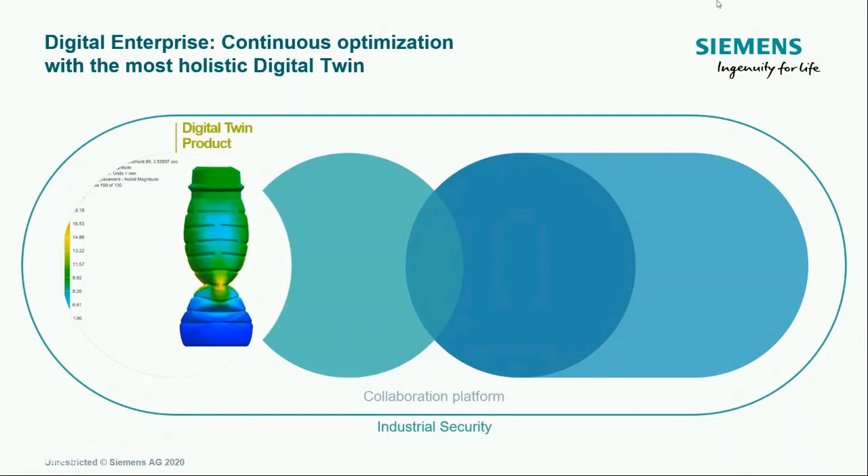The first digital twin is the digital twin of the product. In this, you would use, for example, CAD/CAM software in order to envision your product, define it, and so on. But not only that, you would also want to simulate the performance of your products and so on, so you would like to see the flow and motion analysis, the engineering optimization, and so on.

This really helps in developing a product where you don't have to build physical prototypes. What happens under the digital twin of the product is that you're able to bring together that design principle, the mechatronics concepts or electromechanical design, and put that essentially along with the simulation in a singular layer of digital data model behind it. When you're able to do that, you're actually able to create that virtual product in a much better manner - that's what the digital twin of product is.

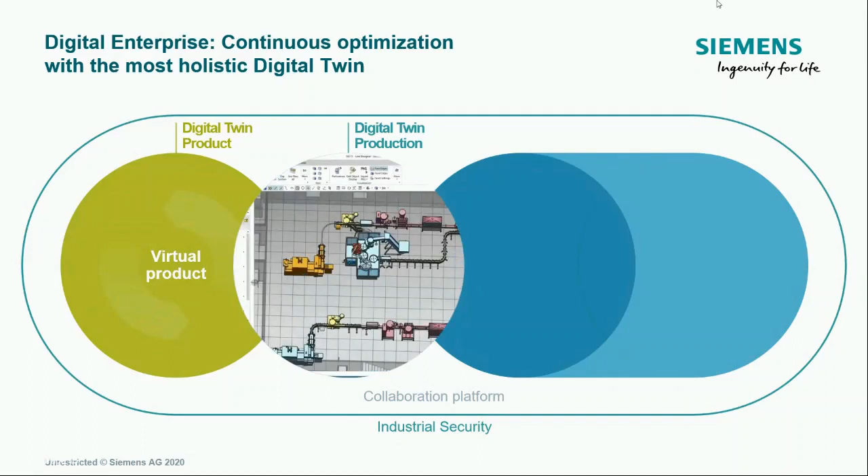Now that you have developed the product that you want to make, you want to envision how you would actually produce it. This is where the second digital twin I would introduce is the digital twin of production. This is basically looking into how would you lay out a complete factory - what all do you need in your factory environment, how many people would you need, what kind of line setup would you need, robotics and so on, what are the buffer times that you want to plan, and what's the output of your factory.

All this can now be done in the virtual world. So without even laying a stone or a brick in your factory environment, you're actually able to make your complete factory in the virtual world and make sure that this is working in a perfect manner to the KPIs that you want to plan it to.

So normally the digital thread, as I call it - the interconnection between digitalization - this is where it would break, because you have the virtual product, great, and people will go on and start doing manufacturing. Not anymore - you can actually integrate the virtual production with the real production already.

This is where the digital twin of production actually enhances with concepts such as virtual commissioning, which I will also be elaborating a bit further, where you can actually have an automation code already developed, test it in the virtual world, and just download it and play it to effect when you actually implement your automation in the real world.

So Siemens has a huge portfolio on automation with motors, drives, controllers, and so on, and that enables the real world. But this is also advanced now in terms of software-based mechanisms which allow us to do advanced automation. We could have stopped there and said, yes, we already provide the automation which is required. But what we actually do is go forward in the real world to drive that digital twin of performance, which is our third digital twin.

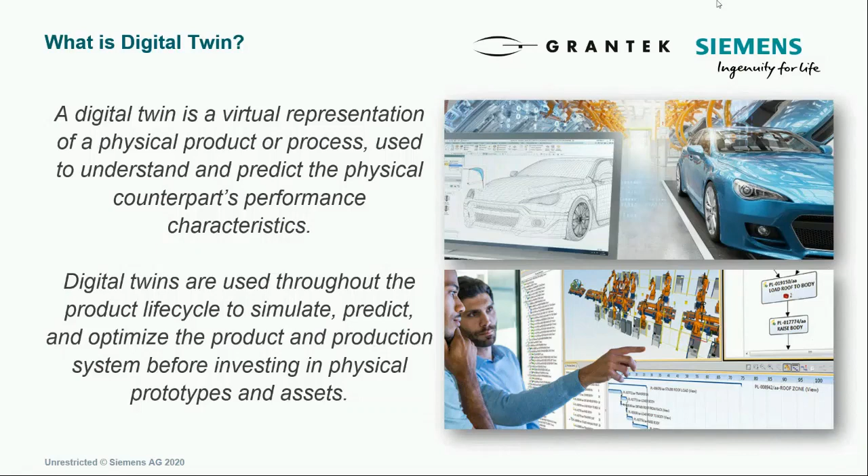And if we go to my next slide, with that in mind, one of the things that I find really interesting when we talk about digital twins is to think about how digital twins are not a concept that is owned by manufacturing and industrial companies. Virtual representations of physical products and processes actually have a lot of applications outside of just manufacturing, which we can look to for even more examples, inspiration, and context.

One of my favorite examples of this are the mapping and navigation apps on your smartphone, and the story of how we got to where we are with them today. Some of you, I'm sure, remember that before we had these computers in our pockets, when faced with the question of how do I get from point A to point B, you would take out your map, which you would hope is up to date.

You would plot out your route and you just go. Did you pick the optimal route? There's no way to really know. And if you hit traffic or construction or a road closure, you'd have to either take a guess or stop and take out your map and plot out a new plan. Then online mapping tools took off, right? Everybody remembers the MapQuest days.

Here we're starting to go digital, and it gets to more useful tools like reliably up-to-date maps along with data like speed limits. This starts to solve the optimal route problem by saying: if you can drive along these roads at these speeds, then this is theoretically the optimal way to get to where you're going. But it's not real time yet.

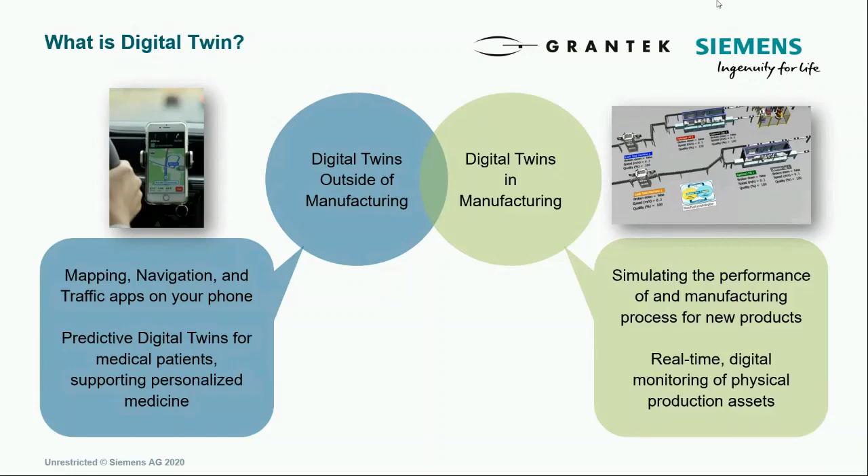And the world is starting to take notice on this too. While the global digital twin market is around $3.1 billion today, it's expected to reach $48 billion by 2026. Unlike some other Industry 4.0 technologies, digital twin is expected to grow most in North America. Most manufacturing applications of digital twin today are in discrete manufacturing like aerospace and automotive, but we expect significant growth into process industries like food and beverage as they start to take advantage of the success stories and lessons learned in other industries.

Finally, it's important to note that the foundations of digital twin are often already in place and in use today, but they're often guided by people and may not connect to real-time data. A SCADA system is a form of digital twin, but it usually requires a human operator to interpret the information and make decisions. We're going to see that start to change as we tie more automated, intelligent computer systems into this real-time data feed to help us make more informed decisions and changes to our processes.

So now that I've given you a little more background on what the digital twin is and why it's important, I'd like to hand things back over to Shalabh to give us examples of the actual technologies used for product, production, and performance digital twins. Back to you. Thank you, Sam, for that.

I'll try my best to give you a couple of examples on each of these digital twins. They are in no manner comprehensive enough, but at least it gives you an idea of a couple of the portfolios which go under each of the digital twin categories.

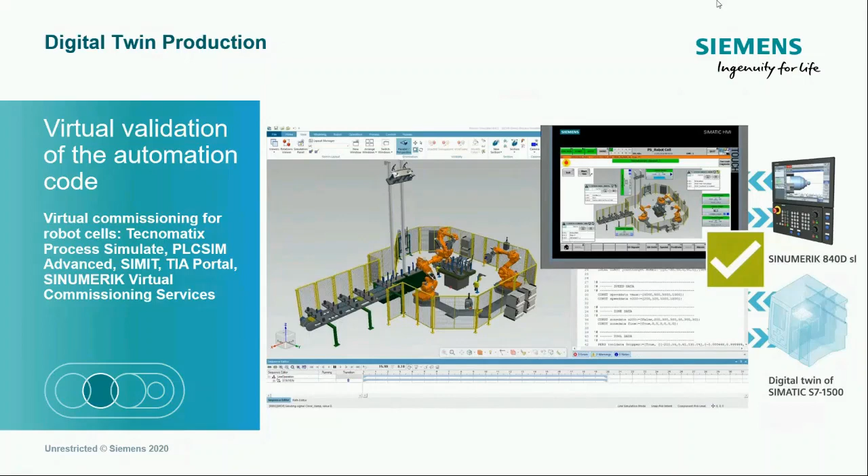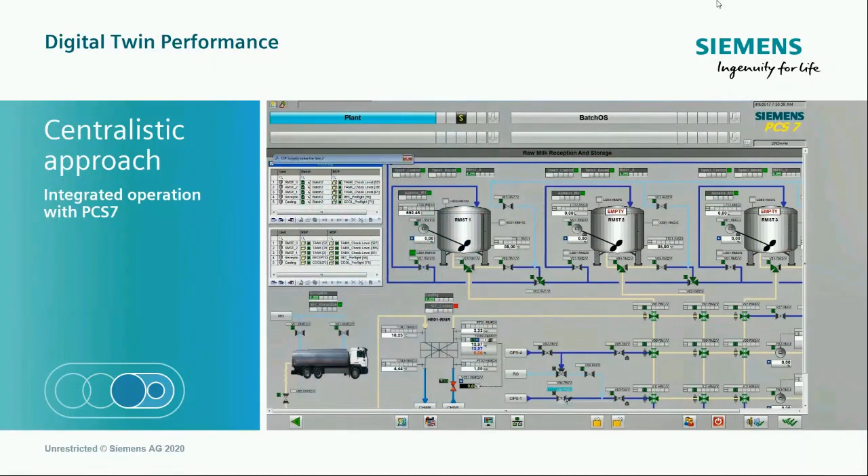Lastly, I touch a little on the digital twin of performance, and here is our integrated operations with PCS7, which is our DCS system. It helps optimize production based on high plant and process transparency within a digital twin. It also gives seamless transfer of data and testing of automation functions when used in combination with SIMIT. The simulation functions of SIMIT get the automation data directly from the PCS7 and COMOS solution, and offer the possibility to test the automation code and process control functionality.

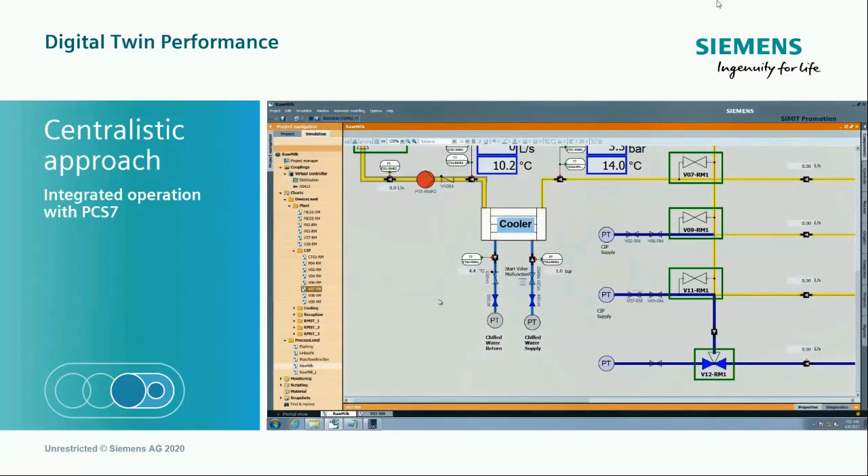With SIMIT, as I was saying, this is a really good portfolio. You can also do things like operator training, so that your operators are trained before you actually end up doing the process. So in totality, the benefits are efficient and smooth system startup, increased safety, and avoidance of errors and costly rework.

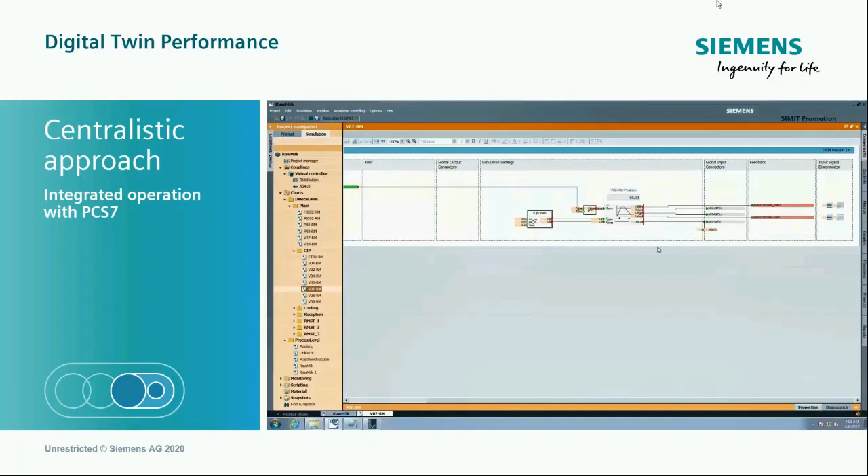So these really are the three digital twins, and I tried to give one example under each umbrella to see how they can add value to your operations. Sam, in going further, would you have certain use cases of how these digital twins can be used?

Yeah, absolutely. I would like to take that and go through the production and performance digital twins to talk about some use cases and examples, and some tips on new philosophies for how we can approach the digital twin for these areas.

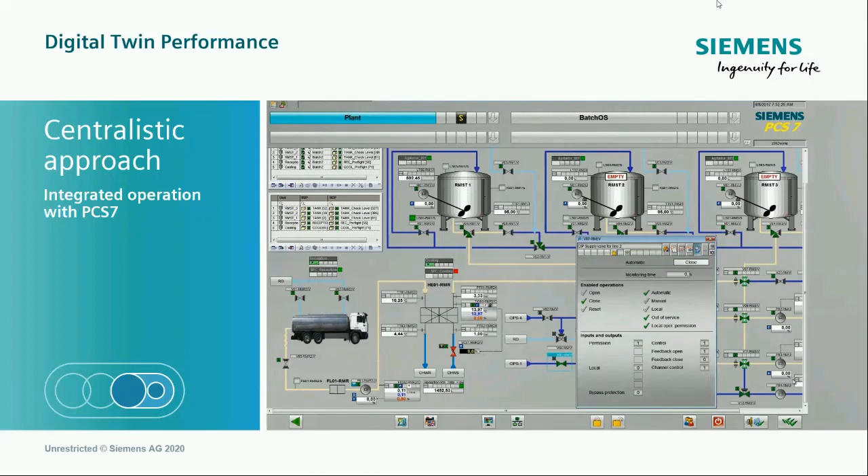So if we go to my next slide, we'll start with the digital twins for production. This is where we have a digital representation of our actual production process, and it's particularly useful when you're considering changes to production, like the commissioning conversation we were just having. Commissioning is expensive. You lose production from required downtime, you need to pay for an on-site engineering team, and significant changes are inherently risky to your overall processes. So there are clearly opportunities for savings by reducing time and reducing risk around commissioning activities.

So when we talk about virtual commissioning, really the essence of what we're talking about is using the tools that we can to take any activities that would normally be done on site and bring those back into the digital world, using modern simulation and testing software to validate code and process changes. That's not to say that all of commissioning can always be done virtually.

There are a lot of tasks that typically still need some on-site presence, but the more we can bring off-site and test virtually, the less time and risk we have in our actual commissioning processes, which just leads to direct project savings.

When it comes to product digital twins, we're more focused on the digital replication of the physical product we are producing. You can imagine how in some industries, especially automotive and aerospace, having a digital copy of every individual serialized part produced could really help with things like preventative maintenance on that part.

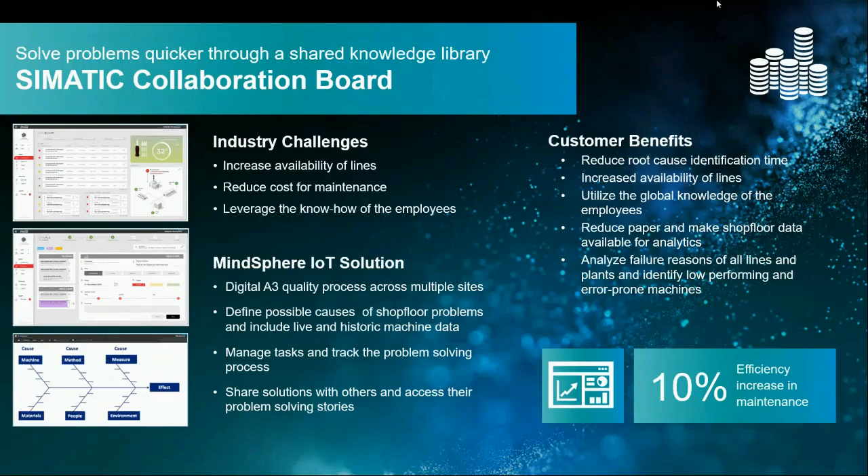But we could have been satisfied with that, right? And we could have said, yes, we have the digital twin of the product, production, and even performance, and we have the IoT platform. Everything is good, but where are we taking this further?

Actually, what we are trying to drive is how do we solve this complexity? How do we make it much more efficient? And if we were only basing our decisions only on data, you could do a big science project out of it, right?

Some of the mathematicians and statisticians in the group might think, okay, if I get all the data, I can dig into this and create so many different variations of what could be done.

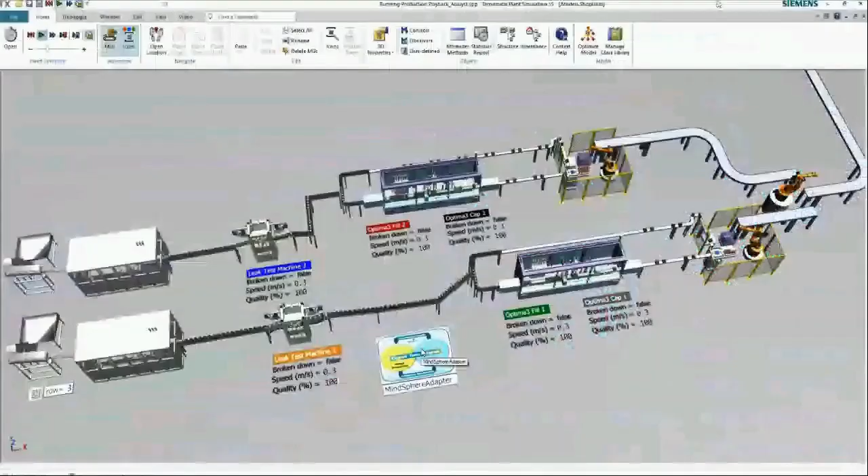But what we did is we started combining the physics-based model with the data-based model. That's the beauty of Siemens, and the solutions are really integrated. So whatever you simulated in a plant environment and you made some assumptions in order to what you want to drive,

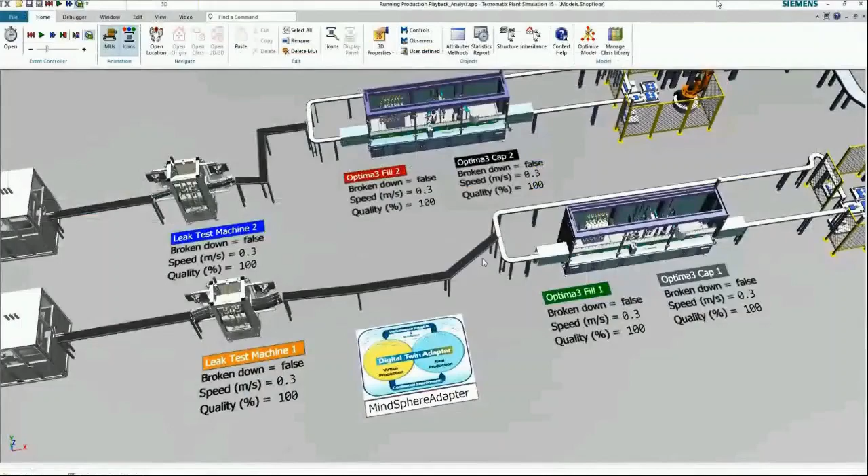you can actually, with a click of a button, drive the actual data back into the simulation, and you can see really now whether what you had planned is what is getting executed, because you now are backing it with real data.

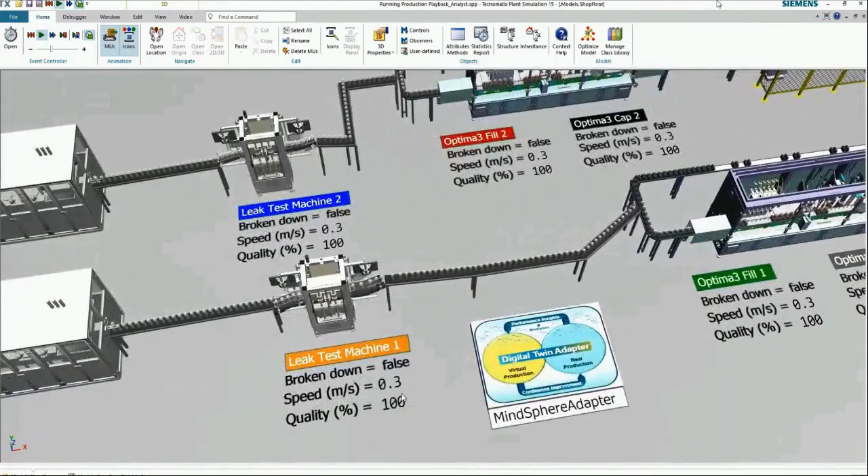And that's where you start measuring the quality, the speed, what was my breakdown time, and so on, because you're combining what was planned to what is being executed today.

And that is all combining and integrated with our solutions, around MindSphere, and as I said, around Tecnomatix. So this closed loop manufacturing is something which we are enabling, and we are making it simple.

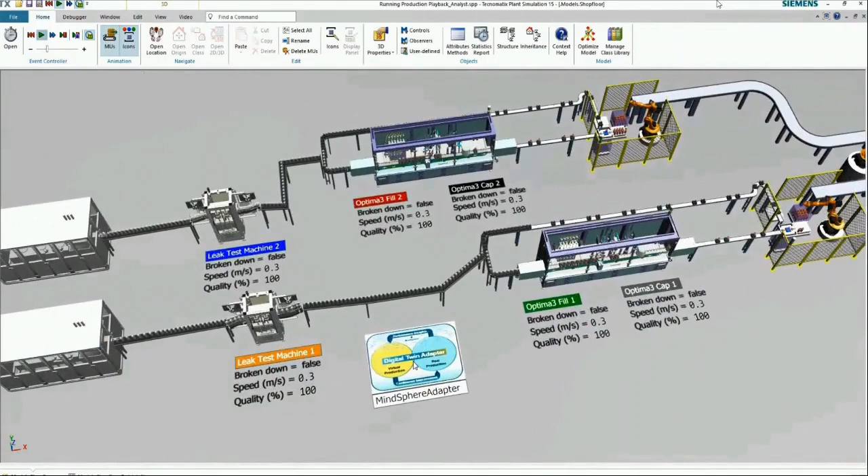So that the complexities which go around digitalization, you have simple and efficient methods in order to actually do and deliver it, right? Sam, that's it from really my side, on the technological landscape.

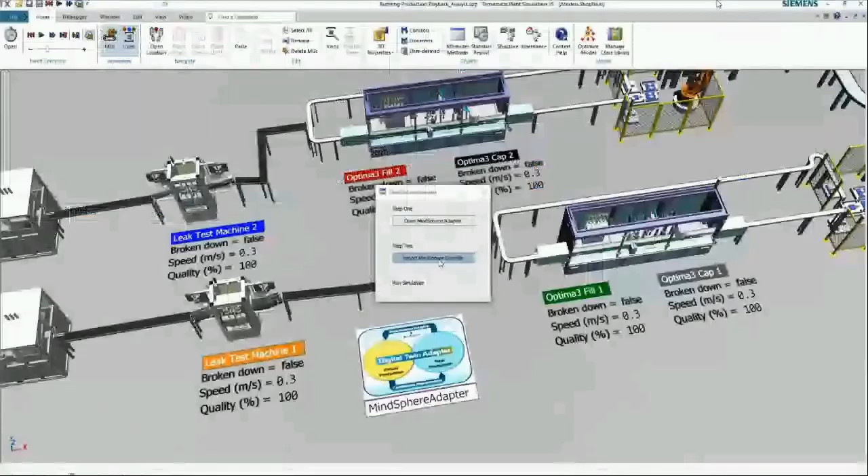But if you could elaborate a little bit from your perspective, where do we go from here? How do you actually go about doing these solutions and implementing that in our manufacturing landscape? That would be great.

my first recommended step is actually around data enablement projects. So digital twins need good data to be successful.

And that data can come from a variety of places like your manufacturing systems, ERPs, operators, warehouse management, and more. Some of these you might not always be used to connecting to automatically within your manufacturing environment.

So as a systems integrator, a lot of my job is to go and investigate a lot of different plants and evaluate where their next steps should be. Given the maturity levels that I often see in food and beverage specifically,

I do recommend taking a closer look at evaluating your MES for potential improvements, investigating IIoT and edge devices, researching new data protocols, and having an assessment plan for some of your facilities.

Now, to start with the MES layer, this is the layer that is going to be enabling communication from your real-time plant systems like SCADAs and your historian data with the business systems located outside of your plants like ERP, PLM, supply chain management, etc.

Your digital twin could and probably should leverage data from both the plants and the business, so that MES becomes a very important information broker in this overall platform.